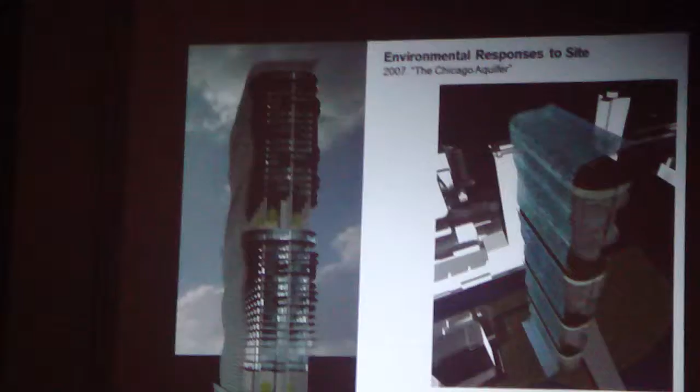Recycled rainwater on the roof. But you know, the roof of a tall building is relatively negligible. It's the facade of a tall building which is important. And here's the thing, rainwater doesn't fall down vertically. It's driven by wind, especially at height, so it's rare that it falls down vertically. So if you want to collect the water, chances are it's about collecting it off the facade and off the roof.

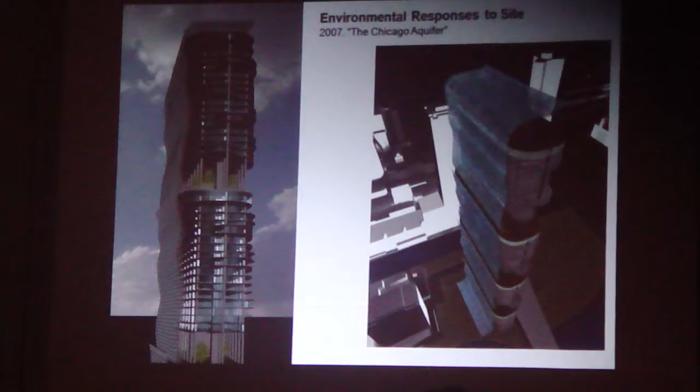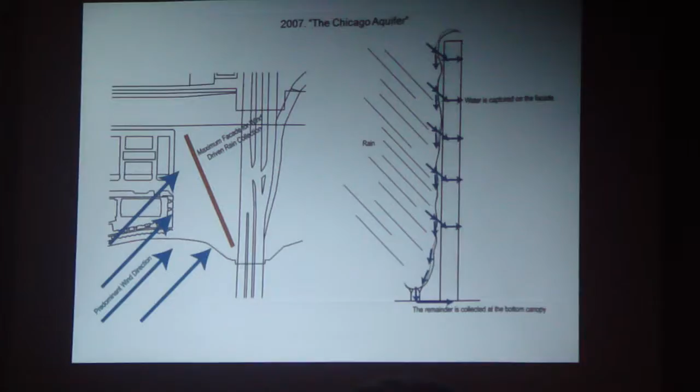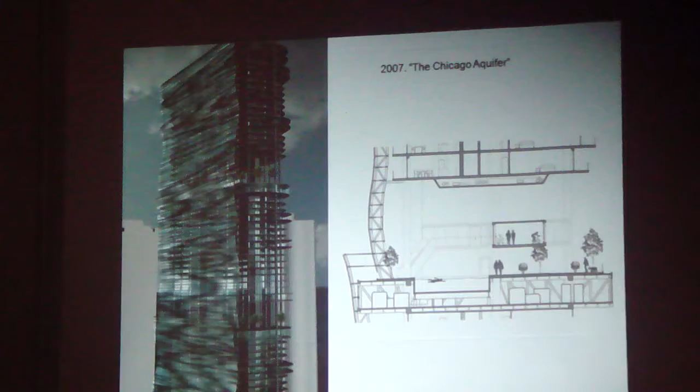So that's what this scheme was doing. It was looking to bring in the rainwater off the facade, and so it made interventions. For example, it positioned itself perpendicular to the predominant wind direction, because that was the thing it was exploring, to maximise rainwater, because water is a big issue. And then there's the way that it used the rainwater in the gardens and various other things. Okay, I like this.

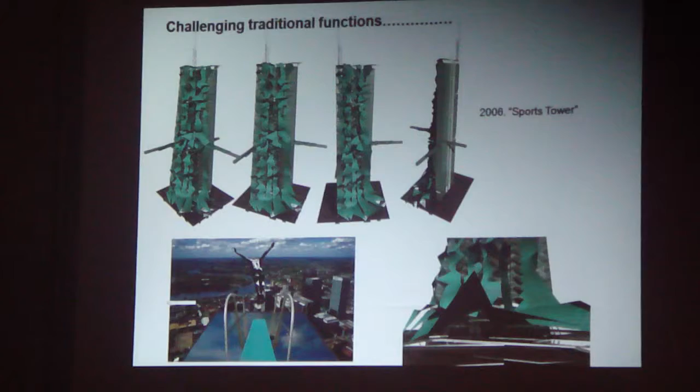Office, residential, hotel - I just described 99% of tall buildings, literally, those are some combination of them. Why is that? What I'm passionate about is creating cities where we bring the whole city up into the sky, and we've got to challenge the uses in tall buildings.

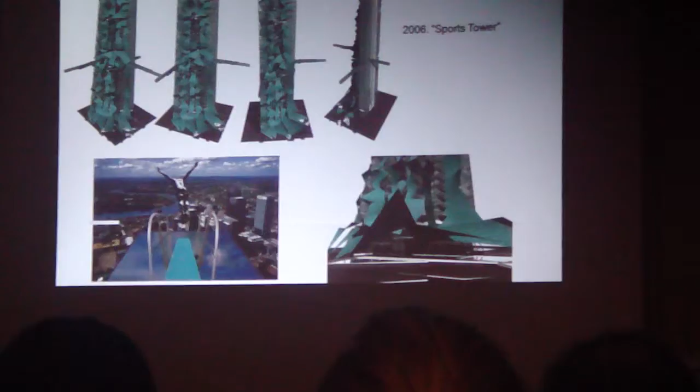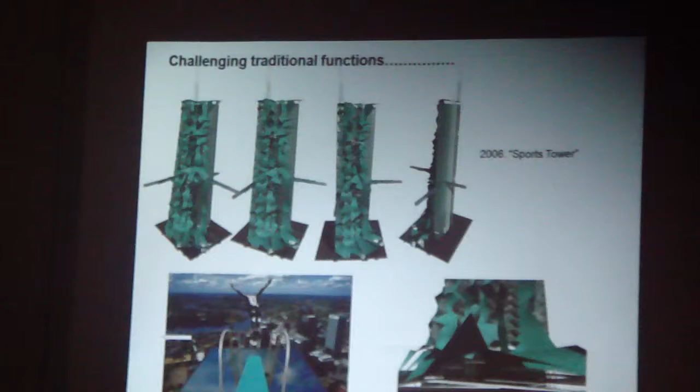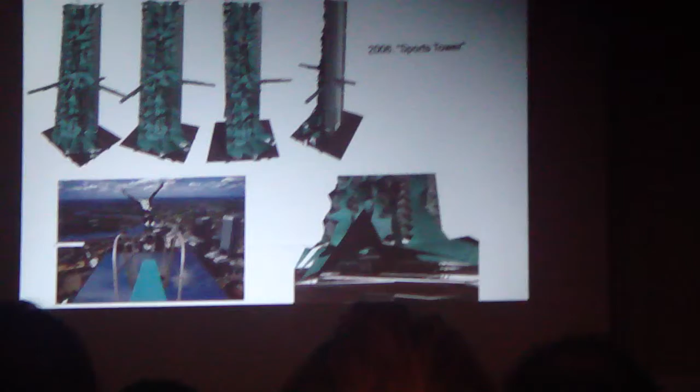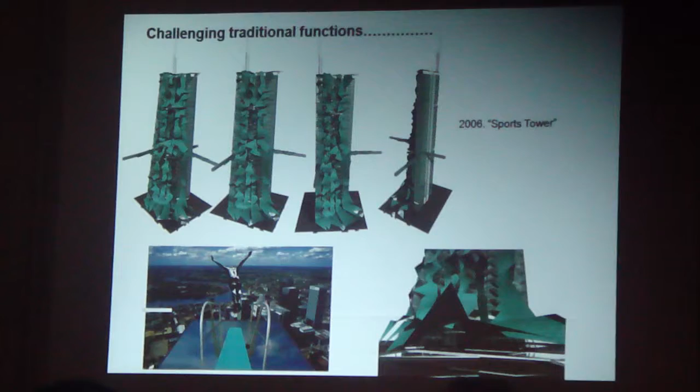So this was a sports tower. It was actually a very sensible office tower, but it also incorporated sports. And you've got to bear with me on this, because you may think this is completely crazy, but there's a sensible idea. This solar shade on the south facade, which is shielding the office space behind from excessive solar glare, is a national centre of excellence for rock climbing. Which means that people would be able to use this building in the same way that Alain Robert, who is the French Spider-Man, uses tall buildings around the world to climb. And that might seem a crazy idea, sat in your office and climbing past.

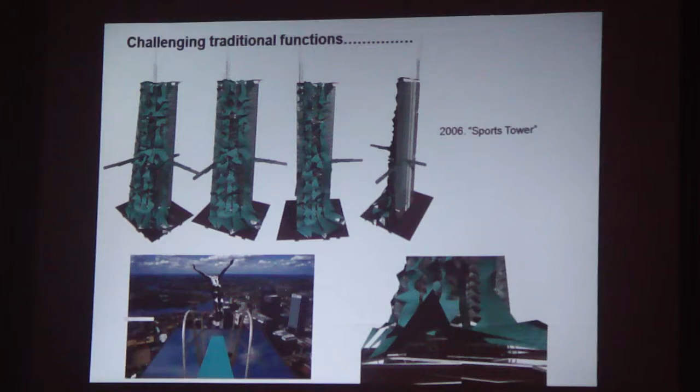Is it actually a crazy idea in sustainability terms? Because if we didn't use it here, that means someone else has got to create a national centre for rock climbing excellence somewhere else in the city, presuming that not everyone can get out to the countryside to climb mountains. And this is, for me, an important idea behind this - what we need to start doing is doing one thing and making it count for 6 things. Stop seeing elements of buildings and materials as just doing one function, as just being a solar louvre.

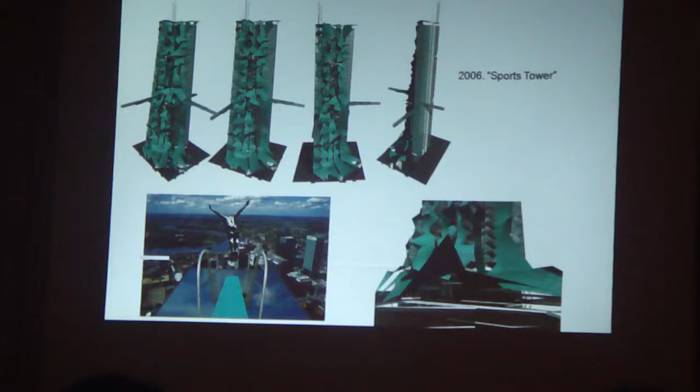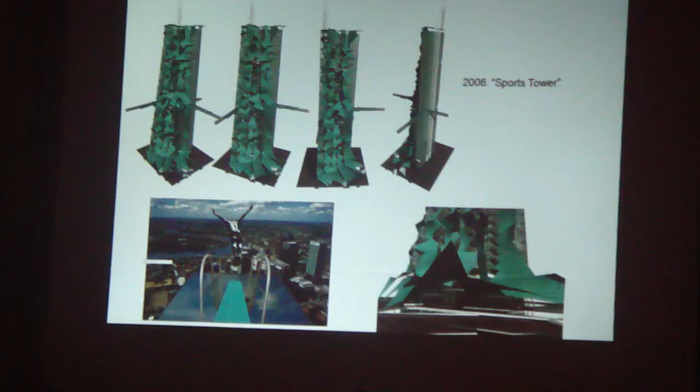I'm involved in a research project which is looking to harness wind energy from vibrations on external solar louvres in tall buildings. Vibrations. There's a nightclub in Amsterdam where they harness the energy from people dancing on the dance floor. This isn't a project, it's built. They do it. We've got to start looking at how to intensify use of materials, expenditure of carbon in any way we can.

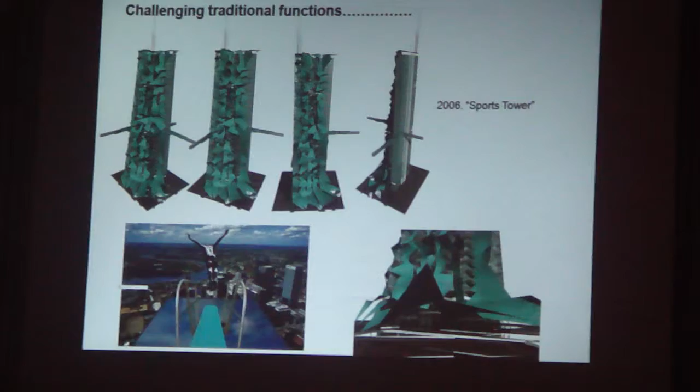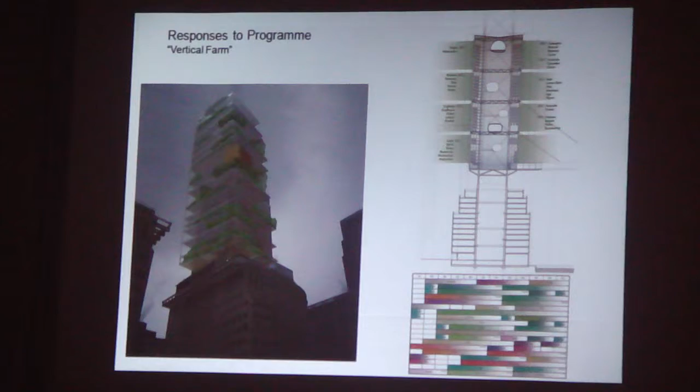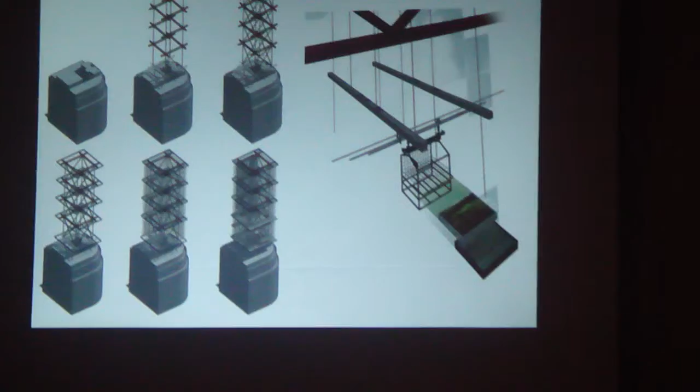Vertical farms. This was a vertical farm in London we did over an existing building. Not a crazy idea at all. It's crazy importing agriculture from thousands of miles from all around the country, all around the world. We need to start intensifying agricultural produce in cities.

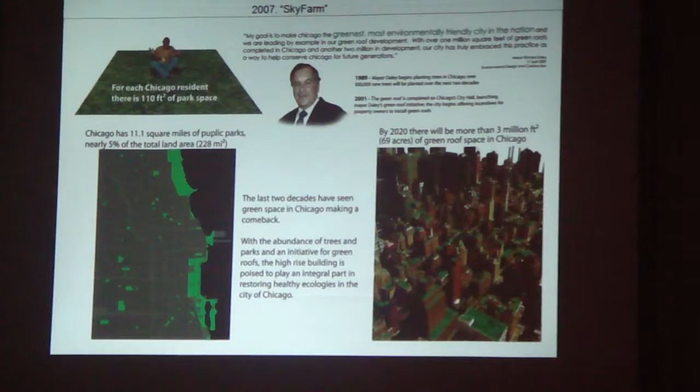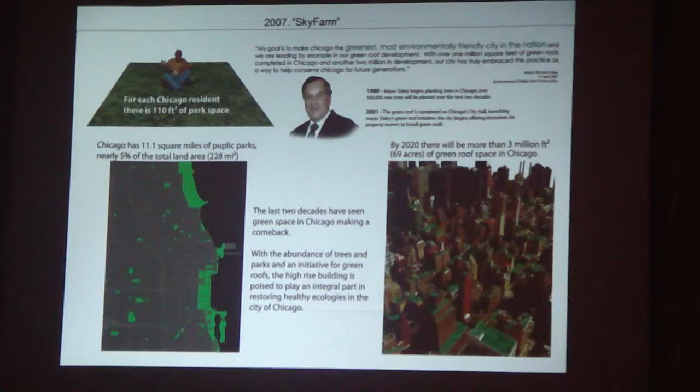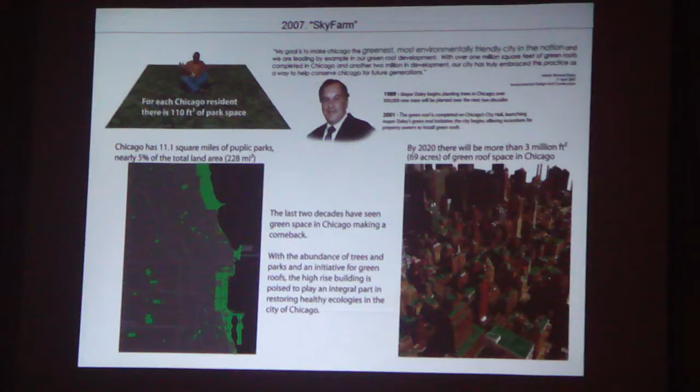And we took this a stage further - I'm almost done now - we took this a stage further in Chicago by suggesting that we link up all of Mayor Daley's green roofs. So they're kind of great at the moment. What happened if we linked them up and started intensifying for crop production? Putting sheep and cows up there for 6 months of the year. Okay, alright, yeah, is it a crazy idea? Probably, but is it actually that crazy? So that's what this scheme was.

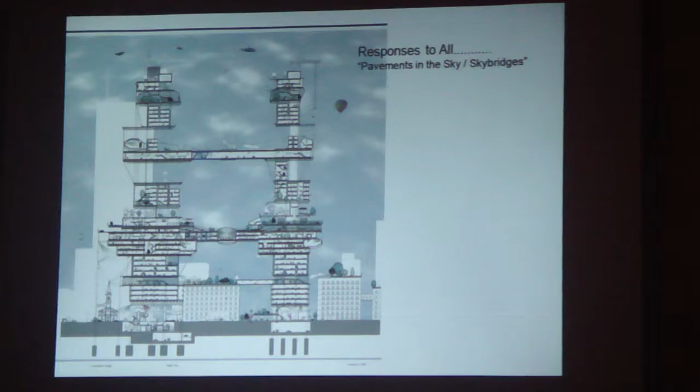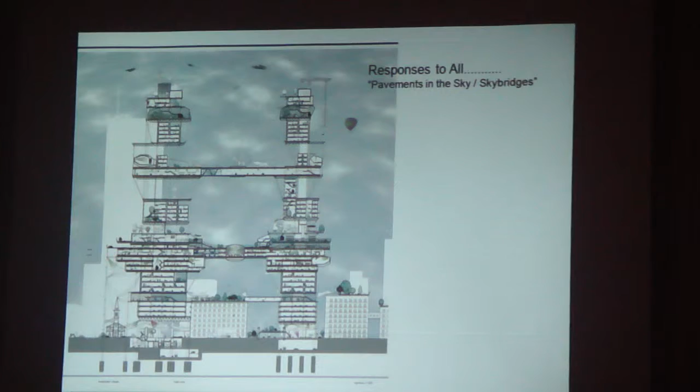And the final thing I do want to say in the last few slides is sky bridges and connections between tall buildings are not a crazy idea. What is crazy is that we're creating ever taller, ever denser cities, and the ground floor pavement is the only plane of physical connection. That's bloody crazy.

We need to start bringing the city up into the sky. And when I say city, I mean the sidewalks, the social spaces, the parks, the doctor's surgeries, the schools, not at the expense of the ground floor, but if you put 10 times more people on the same area of land, then you need those facilities up in the sky.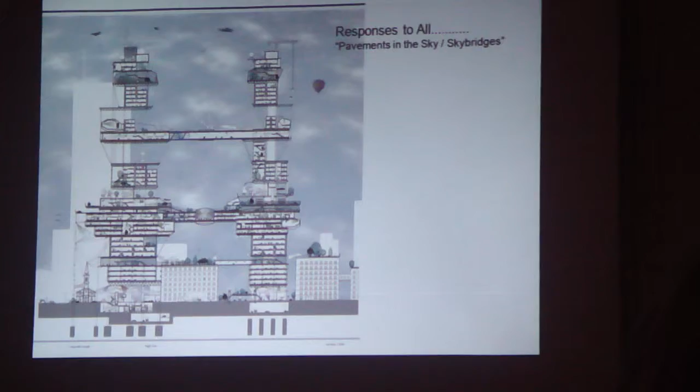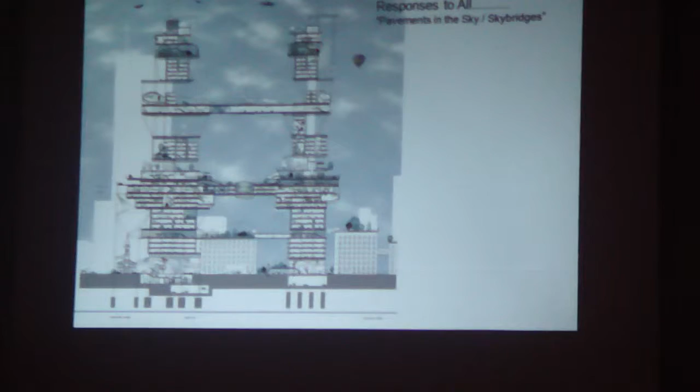And in doing that, we might start to break down some of the architectural egos as well, when these buildings become an element in the urban fabric, vertical urban fabric, rather than just a chance sculpturism or something like that.

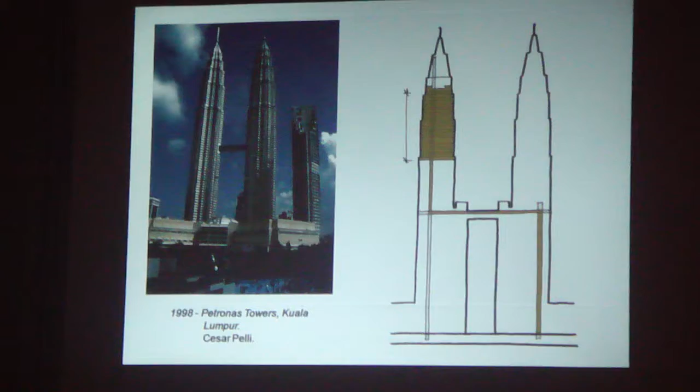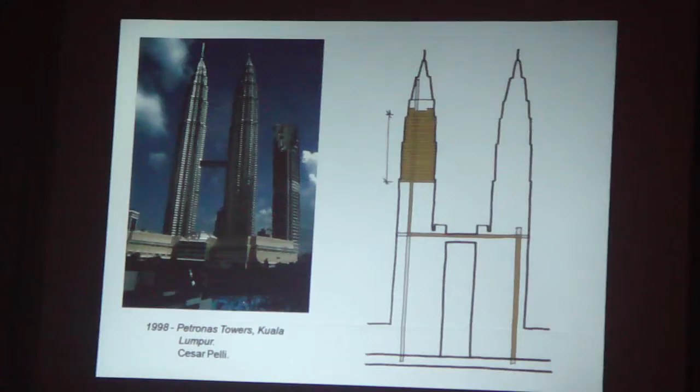By the way, Petronas Towers, which has a sky bridge, that's fire rated, and it was able to omit one fire stair from each of those two buildings. One fire stair times 42 floors times 2 towers is a shitload of money. It's a lot of money that they saved by taking this. So there's lots of other advantages to sky bridges.

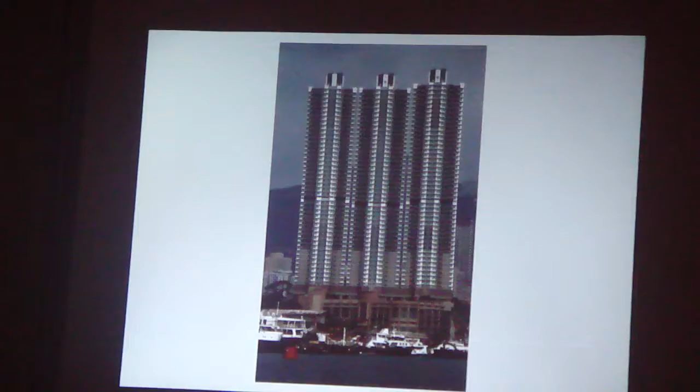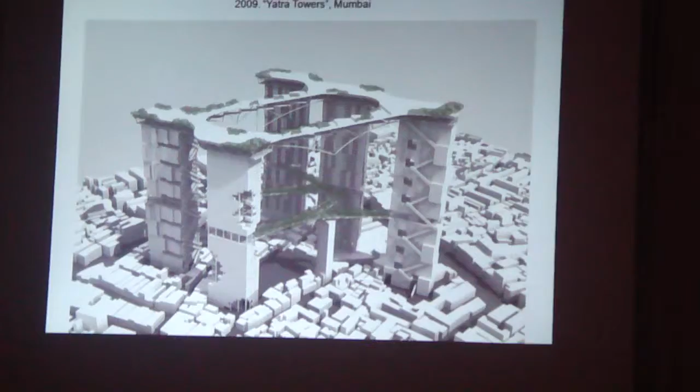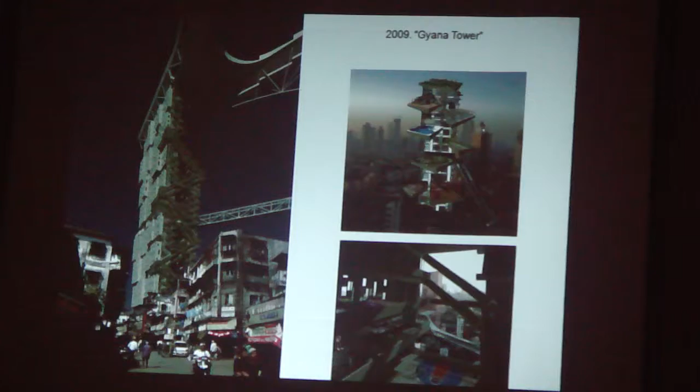And the final project, this is a project we did in Mumbai this year, which looked to create this vertical community in the sky. I'm not going to talk long because someone's going to tell me I've gone over, and I don't want to go because I promised not to. But where one of the towers was, they were all sensible towers, but they all had this additional element. One was schools, one was agriculture.

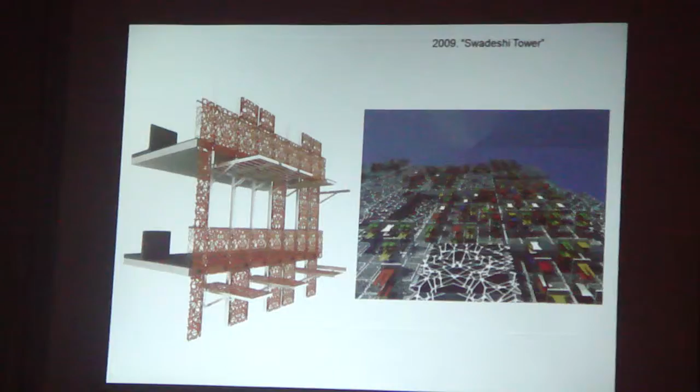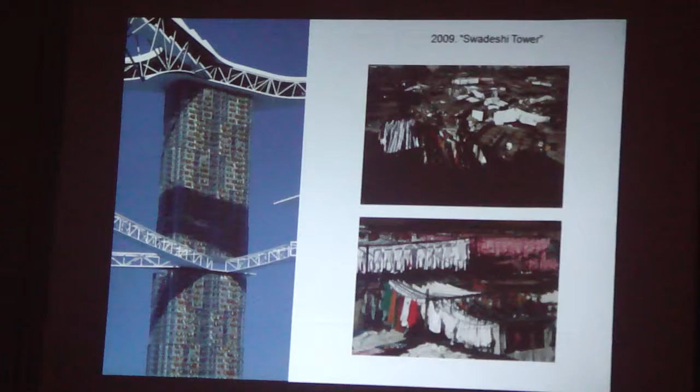Made of local materials. And this scene was fantastic, because this was inspired by what's called the Dhobi Ghats in Mumbai, which are basically big areas in the city that are used for cleaning clothes. So again, you've got to sweep the city, don't wipe it away, sweep it up into the sky. So this building had areas for cleaning clothes which actually became solar shade within the building as well. Crazy idea? Probably.

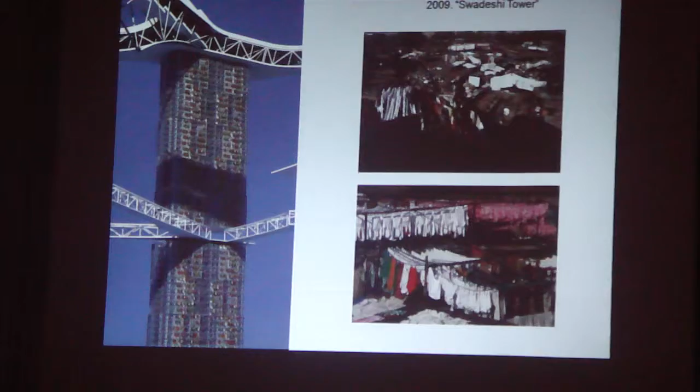Don't write these down, email me if you want to see, but these are my 7 principles for designing better tall buildings. And who the hell am I anyway?

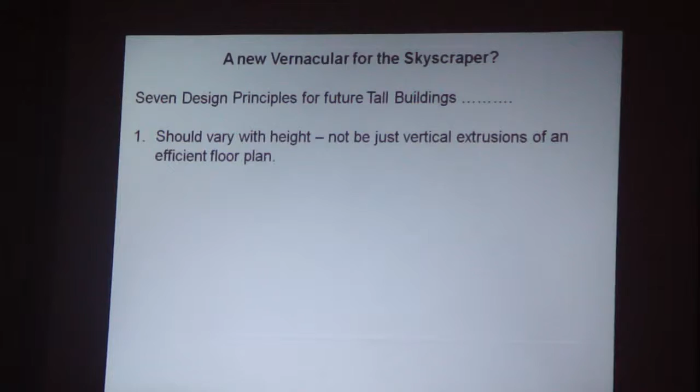But we need to vary them with height. They shouldn't be just vertical extrusions of the floor plan. We need to start thinking about them as many small buildings placed together rather than one big object. That doesn't mean without harmony, but we put so much care into a 3-4 story building that we don't seem to put into a 60-story building. We need to treat each horizon differently.

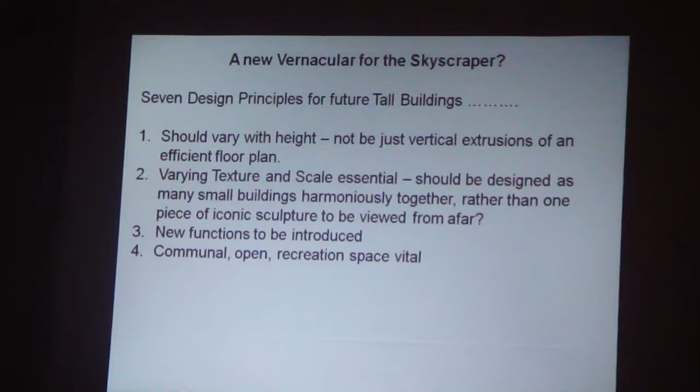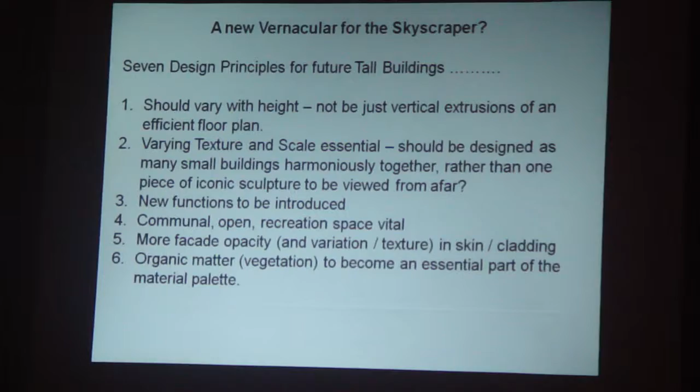New functions need to be introduced. Communal open recreation space is vital, and it's not happening in virtually any tall buildings on a significant level. More opacity, less all glass. Glass is important for natural daylighting, but not all glass. Organic matter, and more connection.

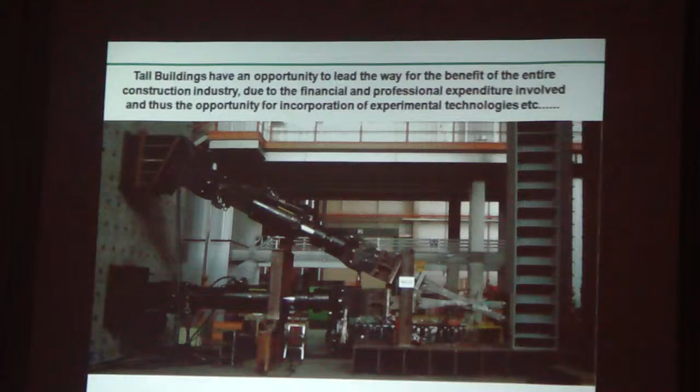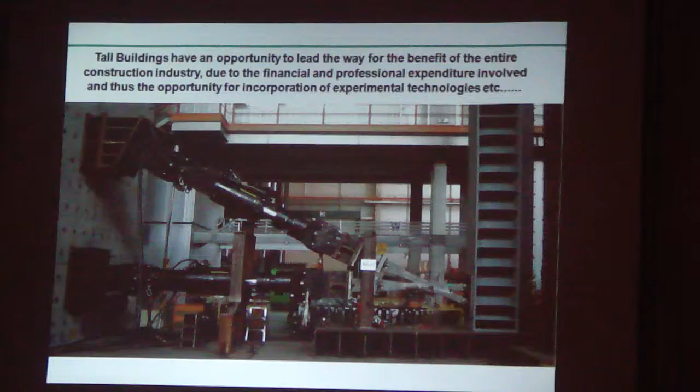And this shows why tall buildings are important, not just because they increase supply density, but that is a testing rig for one little structural element on the Swiss Re building in London. Why could they afford to do that? Because that structural connection is going to be repeated 2,000 times in the building. And tall buildings have a professional, economic and other investment in them that allows them to lead the way for the benefit of all architecture.